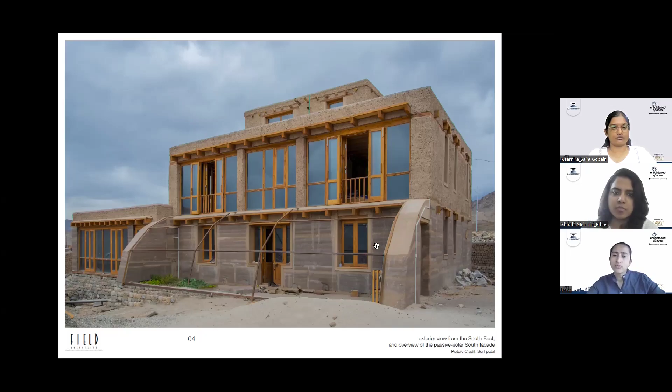And the greenhouse - in the winters, the weather gets very dry, so to have some greens, with the attached greenhouse it also maintains a certain amount of humidity and also helps with heat gain. So this is your living room, kitchen, which has the attached greenhouse in front of the whole space.

So the design is based on the local technique of kabzi, the traditional Ladakhi chansa, having 4 wooden columns, and all the activities just revolve around this room. We had a modern concept with an open kitchen having the 4 columns, and then we have the living area on this side, so it's a through and through space.

Talking about construction, like energy efficiency. So we have dry stone foundations, and we have an RCC tie which runs, and it has a wooden shuttering.

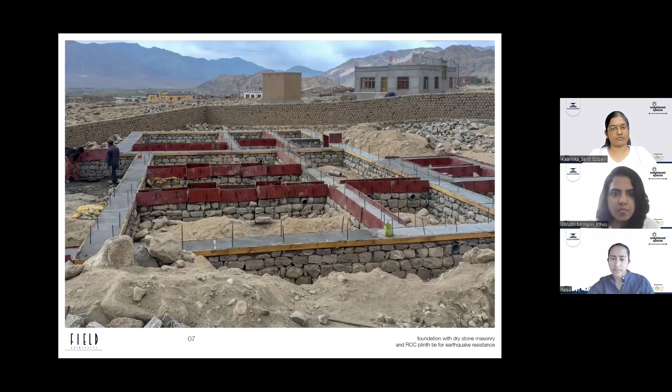We left the wooden shuttering as it is so that there's no thermal leakage. It just breaks the whole thermal leakage which happens through the foundations.

And then we have the rammed earth walls. It's about 60 centimeters thick with styrofoam sandwiched in between. This is for the east, north, and west.

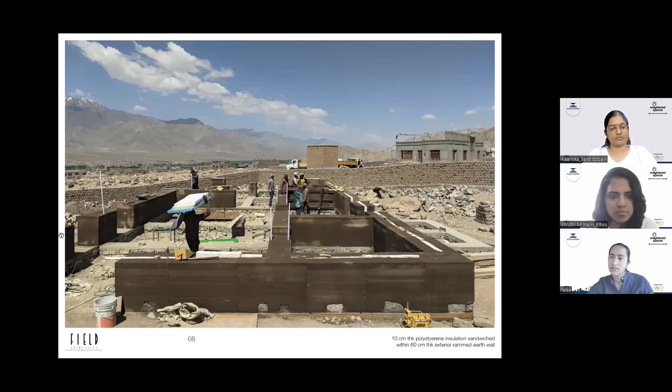On the south side, because we want the solar gain, we have avoided using the insulation. These are the rammed earth walls.

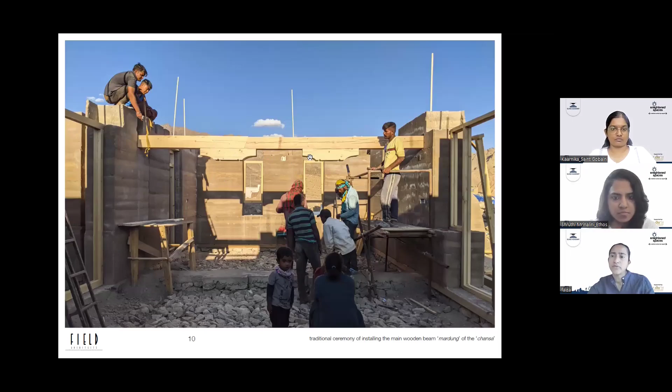This is the living room space, which I had shown the photo earlier of installation of the wooden beam and then the columns and all. And then when you go up, again we have wooden rafters for the roof.

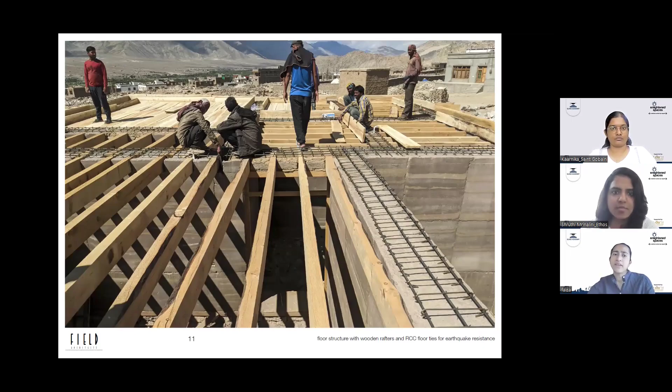Then again we have a roof tie, because Ladakh falls under seismic zone 4, and we need to have some measures for earthquake resistant structures.

And then for insulation here, we have used straw and clay and wood shavings. So wood shavings from whatever furniture or carpentry work happening, the wood shaving is mixed with clay and used as insulation.

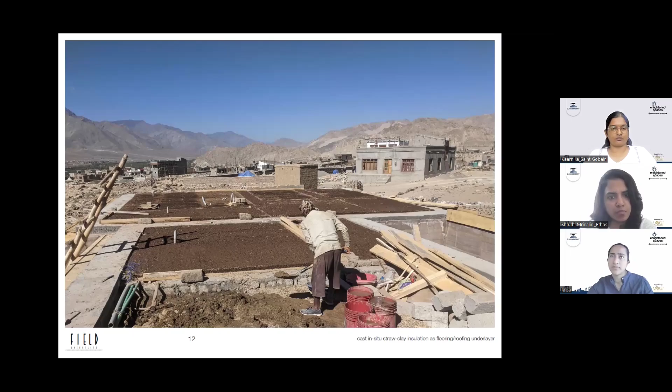That is used as insulation. It's about 6 to 7 inches thick layering.

And then on the upper walls where we have the adobe structure - Ladakh is in the border area, so we have a lot of army mattresses which are second hand, and it's given for a very cheap price because it's second hand, and we can repurpose it.

So we have used this as insulation, to control the budget and avoid using thermocol or styrofoam.

That's a very different and unique approach, catering to the local context, trying to be energy sensitive with local materials, whatever is available.

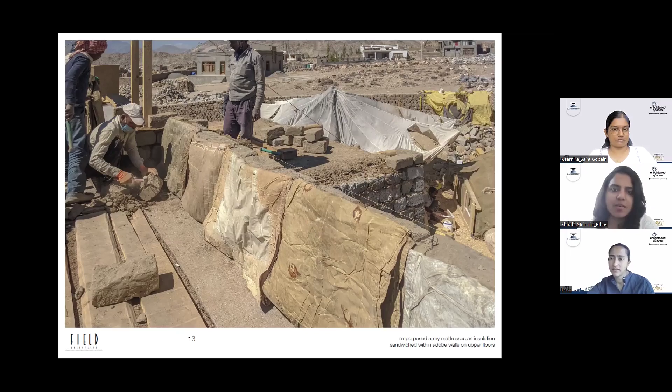Then this is your trombe wall and the greenhouse facade. So the upper wall, if I zoom in, the outside glazing is the DGU.

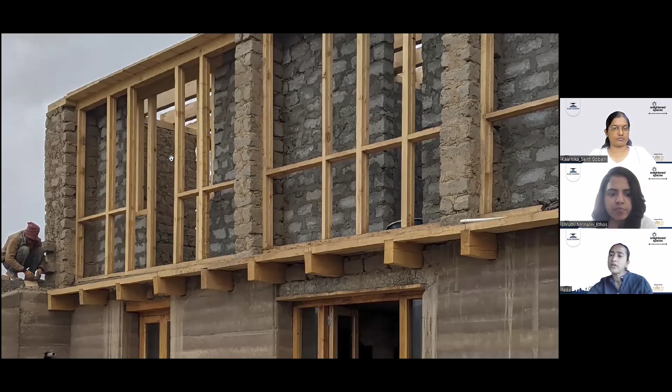So this is during construction. You have DGU outside, you have a thermal mass wall, and inside there is a door which, when open, allows for convection to happen. So this is the whole science of the facade.

So these buildings - when we were at SECMOL, these were the techniques which we learned hands-on working with Sonam Wangchuk, experimenting with buildings over there.

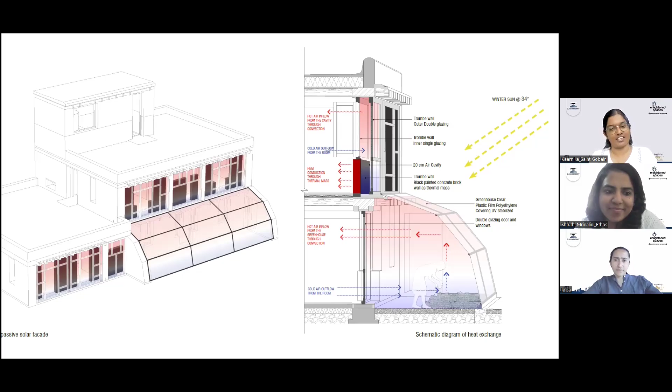Kaarnika, do you have any interesting doubts or clarifications you'd like to ask Faiza? I am very amazed by how she's utilizing two kinds of windows on the southern side, getting as much solar ingress as possible, specifically for a location like Ladakh. Very impressive work, ma'am.